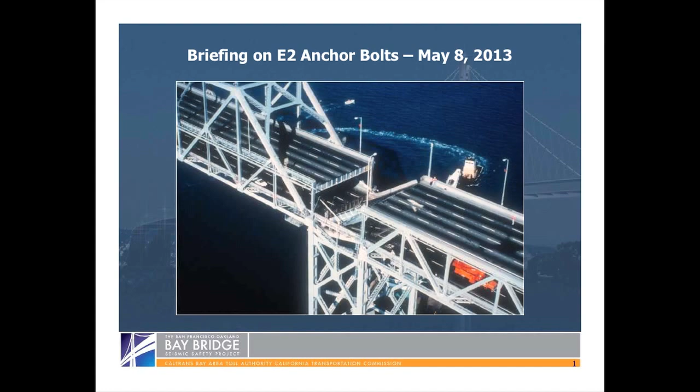We wanted to start today with this picture, just to remind everybody why we are building this project. This is from 1989 during the Loma Prieta earthquake, which was 60 miles away and nonetheless collapsed a large deck section on the old bridge. On the new bridge, we have faced many challenges. We are going to have to fix some bolts. We have fixed welds, we have fixed concrete. We have fixed all kinds of things in construction, all kinds of problems that we encounter.

That's something you do in construction. You deal with unexpected problems and fix them. But I must say also, this old bridge is the biggest problem we've got, and there is no fix to it other than moving traffic onto the new span. That is why we feel such a sense of urgency to get this bolt matter resolved, to get the fixes put in place, and to move traffic over to the new bridge as soon as possible. Next slide.

You'll recall that at the last couple of briefings we tried to organize the information we were presenting around three questions. We have added a fourth, which is sort of an offshoot of the third.

The first question: what caused the bolts on the E2 pier manufactured in 2008 to fail? Malcolm is going to address that question and provide some new information, including a report that we are releasing today. Secondly, what retrofit strategy should be used to replace those bolts?

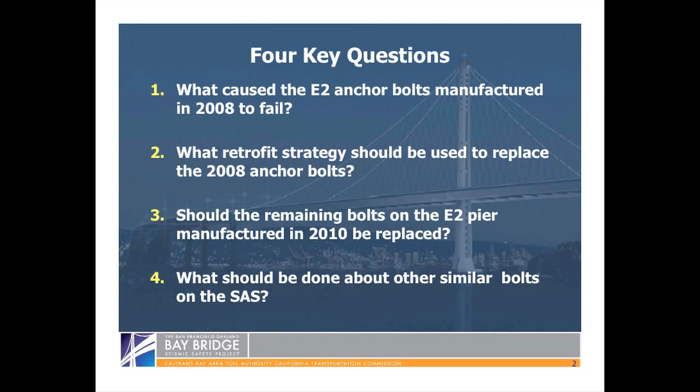Andre has an answer to that question today. Thirdly, I'll be dealing with the question of the remaining bolts on the E2 pier that were manufactured in 2010, as well as the fourth question about the other similar bolts on the remainder of the self-anchored suspension bridge. These are called A354BD galvanized bolts. That's the issue at hand.

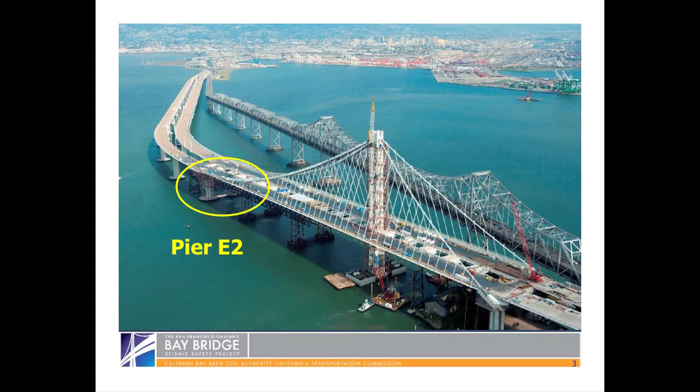Again, that's where the E2 pier is. I think you know that quite well by now. I did want to, at the outset, talk a little bit about our oversight structure, because I think there have been questions raised in the public discussion about this issue about whether we have an independent review underway. My strong belief is that we do, and this slide tries to depict that.

At the top, you see the Toll Bridge Program Oversight Committee, composed of the three parties I've just mentioned. One box down to the left, you see a peer review panel, which is independent of us. It's composed of three individuals, all three of whom are in the National Academy of Engineering, which is the most prestigious engineering body in the United States. To the right, you see BAMC, an acronym for a consulting enterprise we have hired to deal with issues that arise in this project. Their expertise spans all kinds of fields, and we have brought in additional expertise when we need to do so.

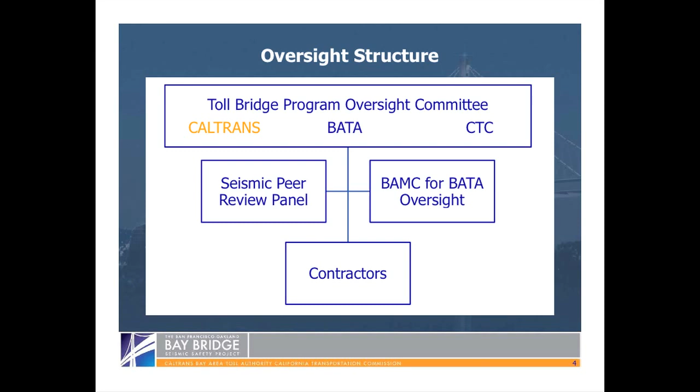And then finally, we have a whole series of contractors who are actually implementing the work. The reason we put Caltrans in orange, that's their color after all, is to make the point that that is where Caltrans is, and everything else in this operation is not them. So there is a good deal of independence here of multiple agencies and multiple checks who are doing this work with us and making sure that we do the work right.

I mentioned the peer review panel, and I do want to mention these three individuals by name because their careers are really stellar, and they have been invaluable throughout the history of not only this project, but the Toll Bridge Seismic Retrofit Program.

Frieder Seible, who is the Dean Emeritus at UC San Diego of their School of Engineering, very well-known, world-renowned expert on long-span bridges. He's now a professor at a university in Australia.

Ed Idriss, who is an emeritus professor of civil engineering at UC Davis, and he's one of those guys that whenever they have an earthquake somewhere around the world, he parachutes in and figures out what happens and helps advance the science of earthquake engineering.

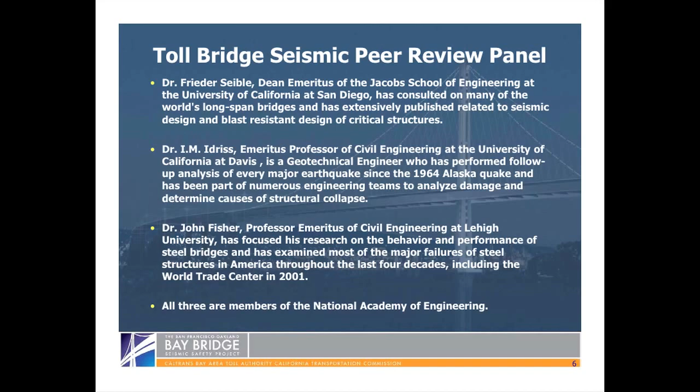And the third, especially relevant for this inquiry, is John Fisher, professor emeritus of civil engineering at Lehigh University in Pennsylvania. Very capable man who has helped us enormously on this project because of his background in examining steel failures, and that is exactly what we had here.

He has looked at those kinds of failures in many places, including on many bridges around the world. He was also called upon, if you'll remember, after the collapse of the World Trade Center in 2001, as one of the experts asked to opine about why that happened.

As I mentioned, all three members are of the National Academy of Engineering. I know there have been questions raised in some media circles about whether these gentlemen are really independent, because we pay for their airfare and whatever else we do to get them out here. I can tell you from personal experience that they are not ever bashful about telling us things we don't want to hear, and that continues in this process as we go.

I also wanted to announce today a step we are taking, in addition to all of that review, to ensure we have an independent double check on what our investigation yields in terms of findings and recommendations. We have asked the Federal Highway Administration to conduct an arm's length review of our review, and they have agreed to do so.

You have at your places a letter we sent today to Vince Mammano, the California division administrator for the Federal Highway Administration, and we look forward to working with them. They will make whatever findings and judgments independent of ours, and I think that will provide a level of reassurance to you, the public, the legislature, and the administration that we are getting to the right answers and the right solutions.

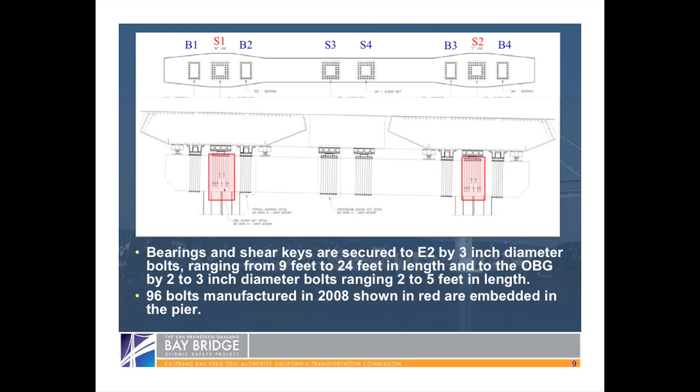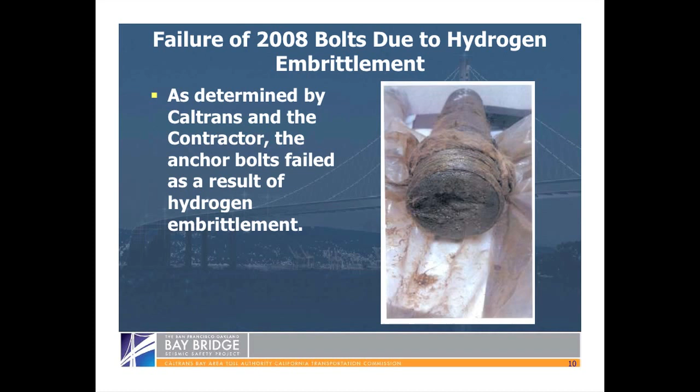Again, we know what caused the failure of those bolts from 2008 — it was determined to be hydrogen embrittlement. We have completed — let me go to the next slide and talk about hydrogen embrittlement as a refresher, as we discussed last time.

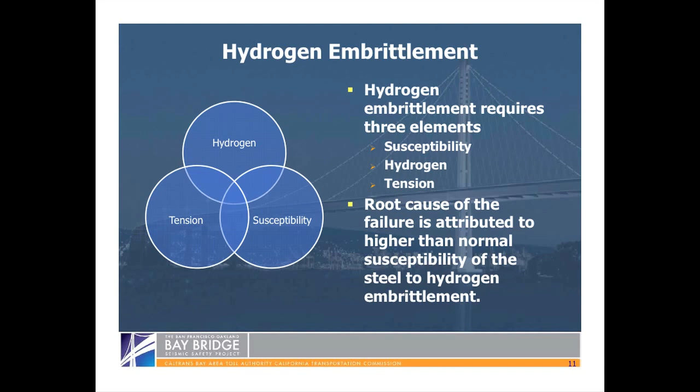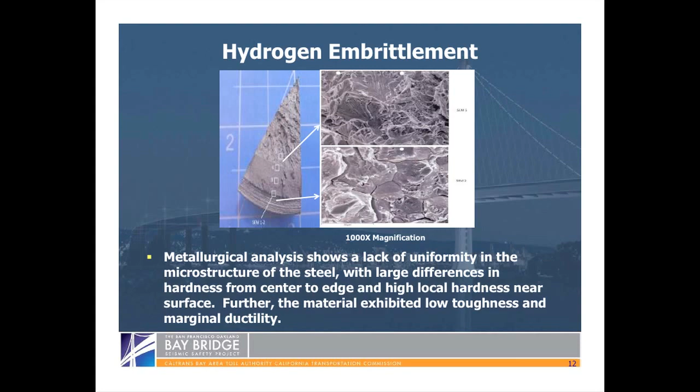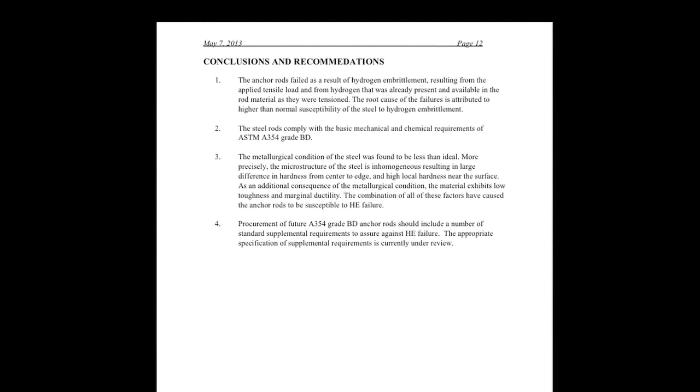In summary, it talks about the metallurgical structure and substructure of the steel in these bolts, which are fundamentally a result of alloy selection and heat treatment conditions, and has apparently made the rods less tough and therefore more susceptible to hydrogen embrittlement.

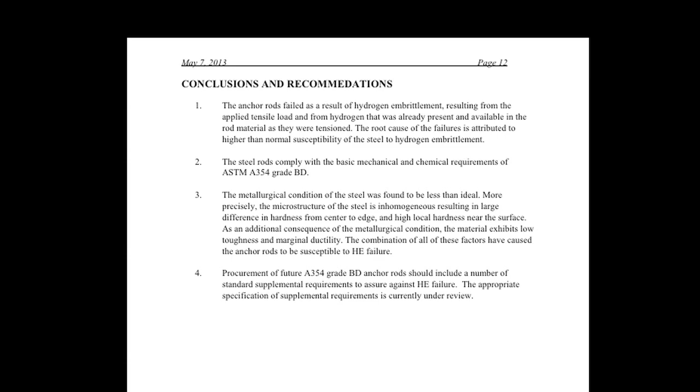On that page, the first conclusion is that the anchor rods failed as a result of hydrogen embrittlement, resulting from the applied tensile load and from hydrogen that was already present and available in the rod material as they were tensioned. The root cause of the failures is attributed to higher than normal susceptibility of the steel to hydrogen embrittlement.

The third bullet is that the metallurgical condition of the steel was found to be less than ideal. More precisely, the microstructure of the steel is inhomogeneous, resulting in large difference in hardness from center to edge, and that's what this picture represents, and high local hardness near the surface. As an additional consequence, the material exhibits low toughness and marginal ductility, and again, we're talking specifically about the batch of bolts in S1 and S2 that came in 2008.

The combination of all these factors have caused the anchor rods to be susceptible to hydrogen embrittlement, which ultimately was the cause of their failure.

The recommendation is that future procurement of A354 grade BD anchor rods should include a number of standard supplemental requirements to assure against hydrogen embrittlement failure. The appropriate specification of supplemental requirements is currently under review, and I think we'll talk about that a little bit later on, as what we're doing with the 2010 bolts may lead us to modify the amount of testing we do on this type of bolt going forward.

This recaps the recommendation that I just iterated to you, and again, the conclusions of the metallurgical study are on page 12. I also want to draw your attention to the information on the front page that highlights the individuals who authored this report. One of them is the chair of ASTM Committee on Fasteners, and the other two: one is a consultant, and one is on staff in our materials testing laboratory.

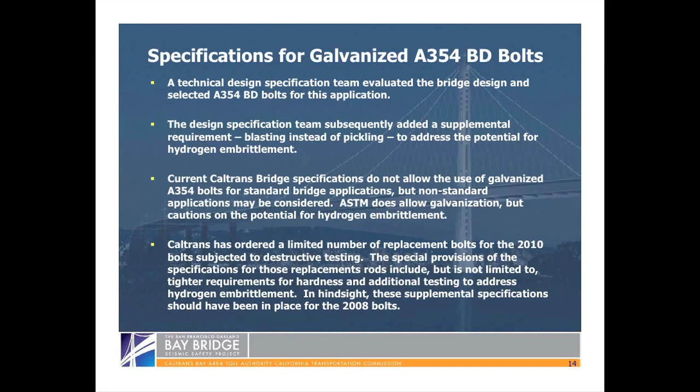Caltrans has ordered replacement bolts for the 2010 bolts that we are subjecting to destructive testing. So not on S1, S2 - there's another batch of bolts that came in 2010, and they are being tested out in the field in situ right now. We are also doing destructive testing on those bolts.

The replacement bolts for those, we have asked for special provisions, including but not limited to tighter requirements for hardness and additional testing to address the potential for hydrogen embrittlement, so that we do not have that experience again. In hindsight, these are the types of requirements that would have well served the 2008 bolts, and this is what we would look at going forward for testing when calling for these types of bolts.

With that, I will turn it over to Andre Boutros from the CTC to talk about the retrofit to the 2008 bolts that I just described as problematic.

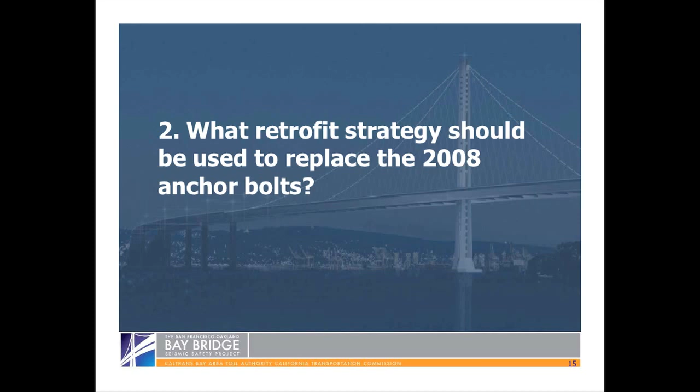If you recall from the last discussion, we talked about two options that we were investigating to put the retrofit in place. The first option was called a steel collar, and just before I describe that, let me give you a little bit of an orientation here to what the colors mean.

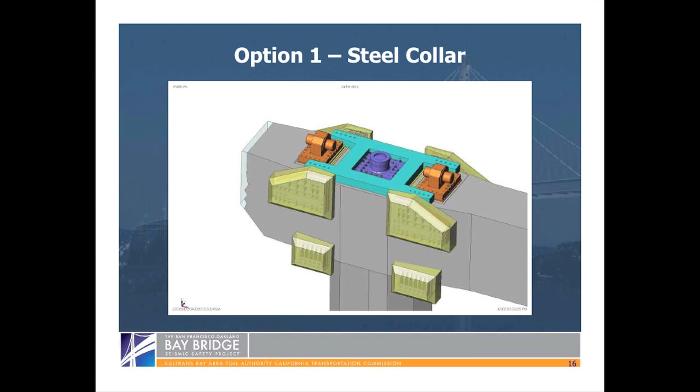The orange colors here are what we're calling the bearing assemblies. The dark blue is the shear key element that we're talking about - that's the element connected with the bolts that failed, those are the 2008 bolts. The light blue is what's termed here as the steel collar. That element is essentially clamping the existing shear key in place into the concrete on top of the columns. The bolts of the existing shear key will all be abandoned.

They'll be essentially taken out of the way so we can perform this retrofit. The yellow are elements that would be required to assist in that clamping force of that steel collar plate.

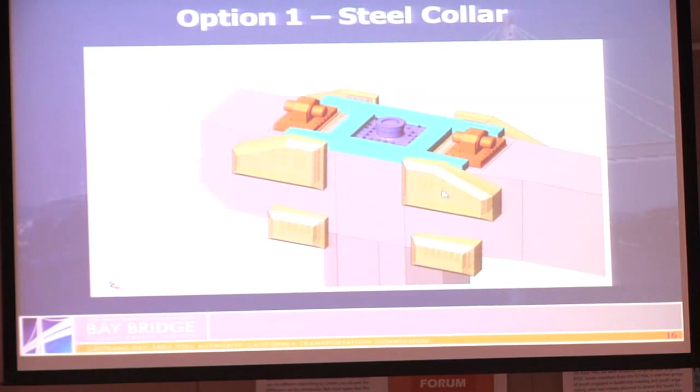So this was option 1. We have another option, option 2, called the steel saddle. What you're seeing here is the bearing assemblies, the shear key, and the purple is the new element, now referred to as the saddle, that essentially sits on top of that shear plate, and will be connected to steel cables that are post-tensioned, and will be covered in that yellow section, which will be additional concrete elements covering all these cables so no one can see what's there. That will perform the same function as the original design in terms of providing the shear capacity.

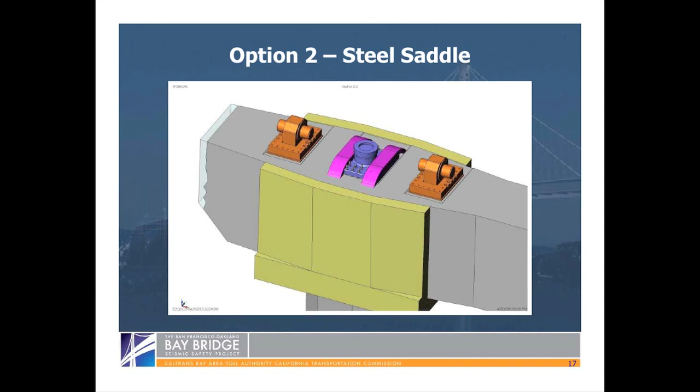For that shear key to resist the lateral forces. After looking at these two options for several weeks, we've analyzed them for constructability as well as cost, as well as pros and cons. Option 1's pros are that we do not mess with the shear key itself, we don't take it out to replace it or anything of that nature. For option 1, the pro is potentially it is simpler to fabricate because it is stacking steel plates on top of each other and anchoring them together and then into the concrete.

As far as cons, there's a lot of steel here that would be required for that particular operation, and there will be a lot of milling and shop machining to make sure those plates are smooth and can fit together. There's definitely more coring related to option 1 into the concrete that we're concerned about in terms of potential damage to other elements of that cap beam. One of the cons is, of course, the cost, which is right now estimated at $15 to $20 million.

As far as option 2, the steel saddle, again there's no need to remove the key. There's less coring required. It is potentially less difficult to install because most of the installation would be external to the concrete, wrapping those elements around the concrete cap. It is definitely less costly, at $5 to $10 million. As far as cons are concerned, there is a special or unique saddle system that would have to be fabricated to make this all happen.

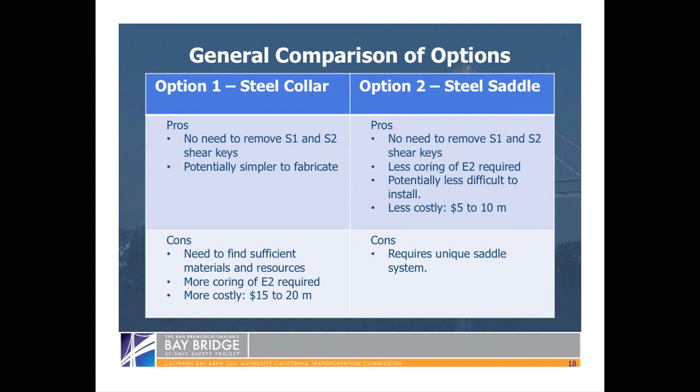After debating both options, we're recommending option 2, the saddle. It essentially, as would option 1, provides the clamping force that would be required to hold down the shear keys as originally designed. Again, the 2008 bolts altogether would be abandoned. They'll be taken out of the way where they conflict with the installation of the new assembly.

Option 2 would require more detailed fabrication. However, installation will be less difficult and will require less coring of the concrete on top of Pier E2. It is definitely less cost.

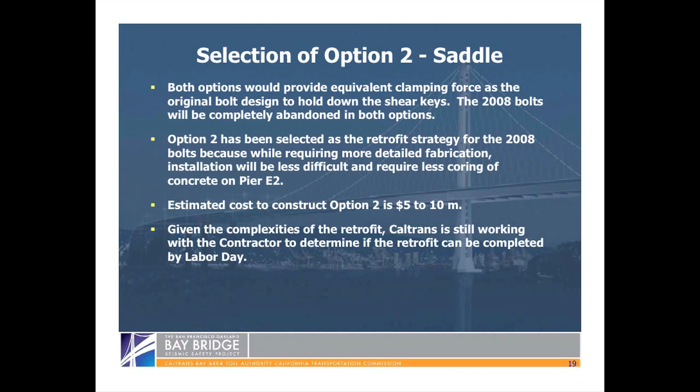As far as the schedule is concerned, we're working with the contractor right now—Caltrans is working with the contractor to make sure this retrofit can be completed by Labor Day. We do not have an estimated time yet. This is in the negotiation process, and it'll have to be worked out in terms of a contract change order with the contractor. But we're hoping this can be in place before the planned opening of Labor Day.

And with that, I'm going to turn it over back to Mr. Heminger to describe the 2010 bolt issue.

Thank you, Andre. The remainder of this presentation will focus on the bolts that have not broken, and that's obviously an important distinction. Here again is Malcolm's slide, but with a little more detail and color. As you know, we've been learning as we go in this investigation, and I think one place where we provided you an incomplete picture in the last couple of briefings is on the E2 Pier. So we want to give you a more complete picture here. We have spent most of our time briefing you on what I'll call the downstairs bolts, the bolts that have been connecting the bearings and shear keys to the pier cap, shown in the longer boxes you see on this slide.

The red ones, again, those are the 2008 bolts that failed that Malcolm has described to you. There are similar bolts made in 2010 in yellow. Those are also downstairs bolts, and they are connecting the remaining bearings and shear keys to the pier.

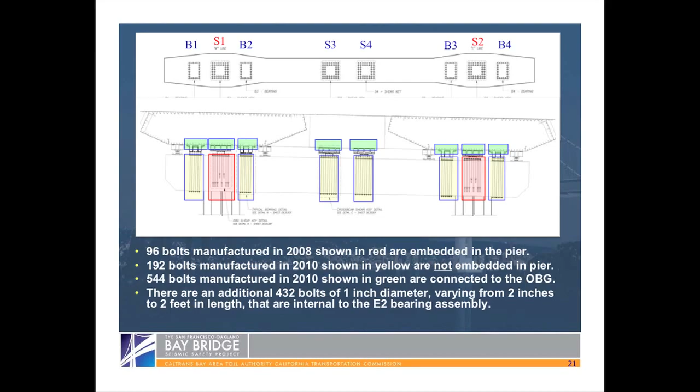The additional 432 bolts I'm now going to describe are 1 inch in diameter. They're much smaller, and in fact vary from 2 inches to 2 feet in length, and they are internal to the bearing assemblies, the B's you see on this sheet: B1, B2, B3, and B4. So that comprises the totality of the bolts on the E2 Pier.

It's about 1,200 of them, manufactured in different batches, 2008 and 2010, some of different sizes. Most of them, both the downstairs and upstairs bolts, are at a fairly high tension level, and the remainder, the ones internal to the bearings, at a slightly lower tension level. As we've discussed, that's relevant to the issue of hydrogen embrittlement, or the long-term potential we're concerned about with stress corrosion.

So having that as background, what have we been doing? We have been testing these bolts, and as Malcolm indicated, not only on site with some field equipment - I think you've seen some of that testing in the press, which is good for the public to see - but we've also been testing them in labs, and when you test this stuff in the lab, you break it.

That destructive testing has been underway, and it involves pulling them apart and examining how they fail, then cutting it up, putting it under the microscope, and doing all sorts of tests to understand what is going on.

The most important finding is out there in the field on the pier, and that is that none of these bolts have broken. The longer they stay that way, the more daylight we're seeing between the 2008 bolts, which had a hydrogen embrittlement problem that generally develops in the short term, and the 2010 bolts, which do not seem to be developing this problem.

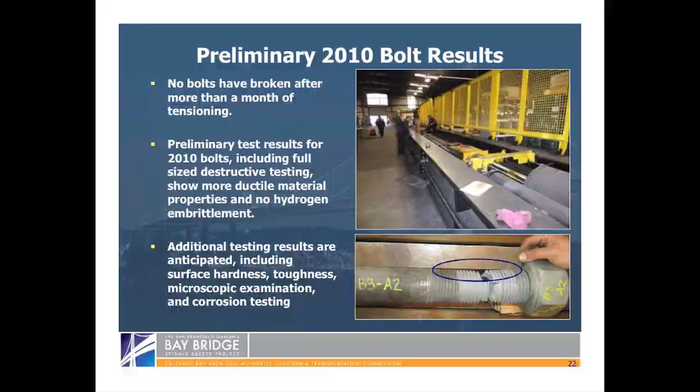We are also anticipating additional test results after today that will be ongoing for the next few weeks, and then there's another test I'll describe that will take a little longer than that.

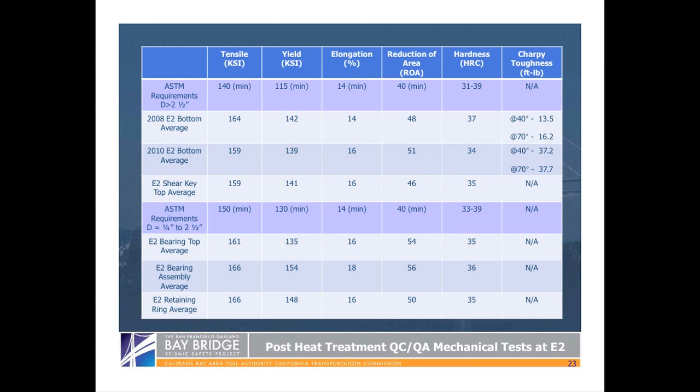If you'll help me with the cursor again - right below the 2010 bolts, you'll see the E2 shear key bolts, and again you'll see a hardness value more consistent with 2010 than with 2008. If you go down the list, you'll again see values, most of them closer to 2010 than 2008. The reason we have two ASTM standard rows on this chart is because they have a different standard depending on the size of the bolt. The bigger bolts are on top, greater than 2.5 inches in diameter, and the smaller bolts are on the bottom.

So again, the data we're seeing is showing a divergence between the 2008 bolts that failed and the 2010 bolts that have not, on various elements of the pier cap.

The other test I mentioned earlier is something we're calling the wet test. What it is, is a test that's trying to - I see some snickering going on, you'll have to stop that - we're trying to simulate a long-term phenomenon, which is stress corrosion.

I think we mentioned earlier that hydrogen embrittlement and stress corrosion are both time-dependent. When you do a test on a material, you don't see it right away in the material - you have to subject them to conditions that simulate a time-dependent failure. In the case of hydrogen embrittlement, as Malcolm indicated, what we're specifying for any replacement bolts is some kind of time-dependent test before you put them on the pier. For example, you take them into a lab, put them under tension, and see if they break. We didn't do that with the 2008 bolts, and we should have in hindsight, because that would probably have shown us the problem in the lab instead of on the bridge after they were already installed. That's the kind of test you need for the embrittlement question.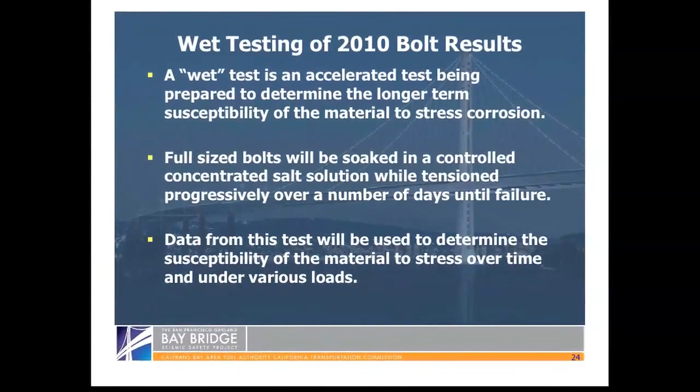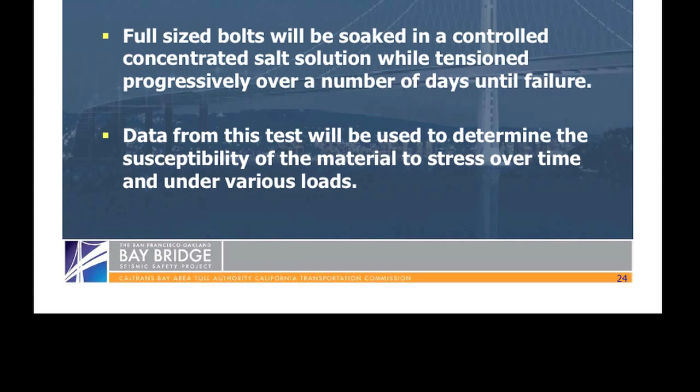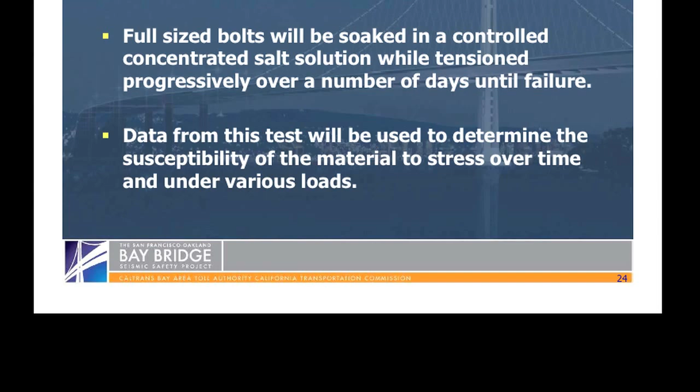We're going to take full-size bolts off the pier from the 2010 batch, and they're going to be placed into a bath of salt solution and tensioned progressively over a number of days until they fail. From that test, we'll learn the particular susceptibility of the 2010 material to stress over time. That will give us good information about how to deal with those bolts in the future, whether they ought to be replaced in the near term or longer term, or whether we ought to reduce the tension on them, given the design of the bridge. We really think this test will help guide what we do with these bolts over the life of this new structure.

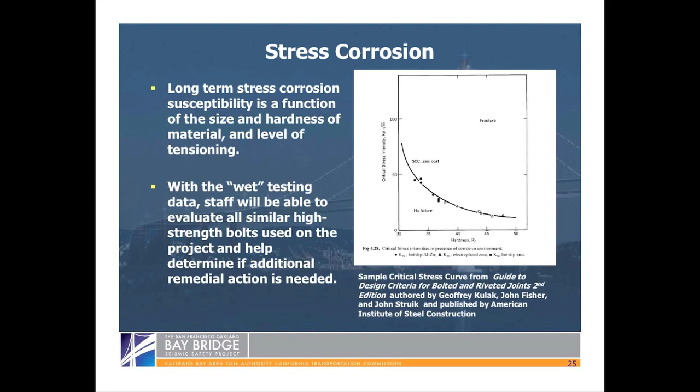The horizontal axis at the bottom is a function of hardness. The vertical axis on the left is a function of two things: the tension level the material is under, and the size of the material. Size does matter here. As you go up that scale, you have more of a problem. As you go right on the horizontal scale, you have more of a problem. So if you have a very hard material, you want it at fairly low tension. If a material is at very high tension, you want it to be not so hard—you don't want it subject to the brittle condition that can lead to failures. This, by the way, is from the textbook of John Fisher, one of our experts.

So those are the bolts on the East Pier—about 1,200 of them. There are another roughly 1,000 bolts that are 354 BD galvanized on the rest of the SAS. What have we done about those? As we informed you at your last meeting, we've been conducting visual inspections of those bolts on a regular basis, and they are performing as required.

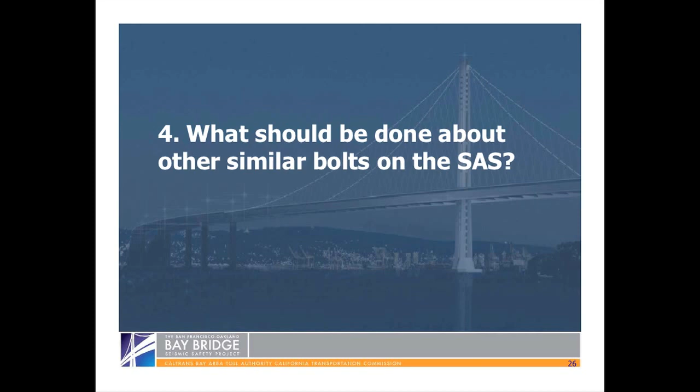It's worth noting, as we did last meeting, that some of the E2 bearing assembly bolts—the ones inside those bearings—we cannot inspect because they're enclosed. They were observed before they were put in and the bearings were closed up. We are tracking down their quality control data, as we've shown here, so we know quite a bit about those bearings. The one thing we can't do with the internal bearing bolts is pick apart the bearings and look at them directly, but we have the observations we made before, plus the quality control information we're assembling.

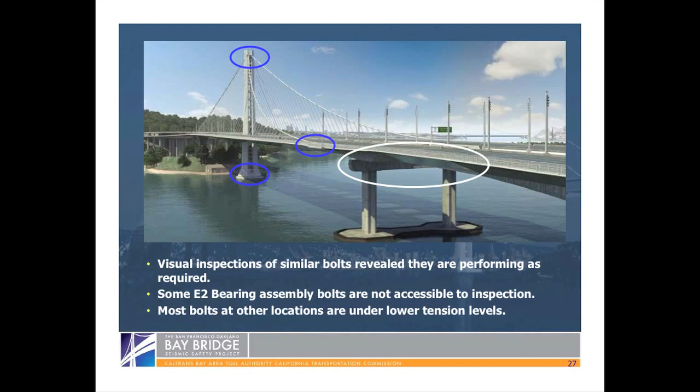The relevant characteristics for you to look at on this chart are, first, the diameter—the bigger they are, the more difficult they are to manufacture, and also the higher up they go on that stress corrosion potential chart I showed you. Length is not as important; the longer they are, that's a bit of a manufacturing challenge, but not as significant as the diameter.

You can see the quantities depicted here, and it adds up to about 2,300 bolts on the SAS. Again, this is contained to the self-anchored suspension bridge, the steel element of the bridge. The vast majority of the length of the new bridge is a concrete skyway, with no bolts.

And finally, highlighted here in purple, that's the tension, and as you can see, it's a fraction of FU. FU is not what you think it means. It's the ultimate capacity, in other words, when it would fail.

You can see that on the east pier, we've arrayed these from roughly more tension to less tension. The east pier is where we have the highest tension levels, which is why we have focused so much of our attention there. As you head down the chart, you see much lower tension levels, in some cases what we would call snug tight, just as you would snug up a bolt anywhere in your garage.

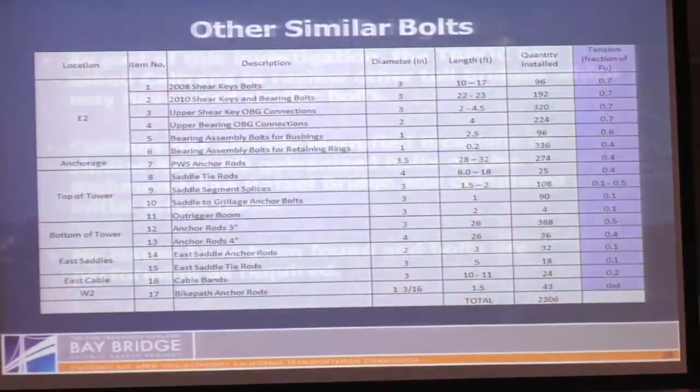As part of our investigation, we have also asked Caltrans to review the other toll bridges in the Bay Area and whether or not they have used any of these A354 BD galvanized bolts, either in new construction or in the retrofit program we've had underway.

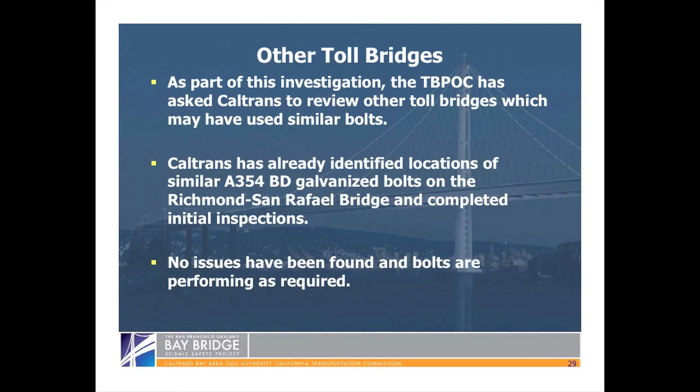Caltrans has identified one location where they were used, on the Richmond-San Rafael Bridge retrofit. Caltrans has been inspecting that area for some time and has records, and they also went out and did some visual inspections over the weekend. We have observed no performance issues.

There are a couple of very important points to make about the Richmond Bridge bolts. The first is they were installed well before the bolts we're talking about here on the SAS. We are going to track down their quality control records and the like, but we're not certain where they were manufactured, though they were put in well before these bolts at issue.

I think the most important difference is they are also snug tight. They are not under any real tension load at all, and that tension is really what matters in terms of near-term embrittlement, which they do not exhibit, as well as long-term stress corrosion potential, which they should have a very low susceptibility to. But we are going to do our due diligence on these, just as we're doing on the SAS, to track down the quality control and continue inspections to make sure we're okay.

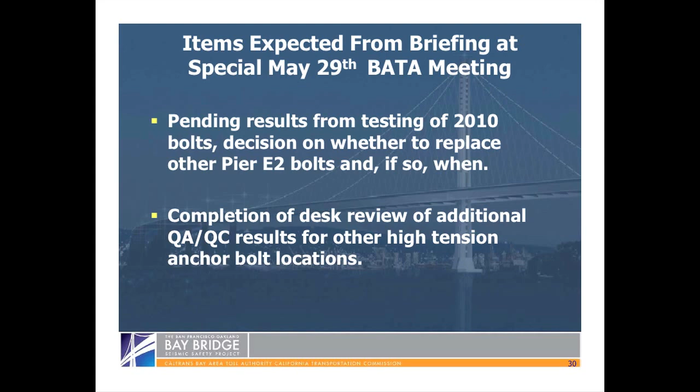In closing, let me draw your attention again to that letter from the Federal Highway Administration, because I think it gives you three helpful categories into which we believe we will be classifying the bolts on the SAS in terms of our future activities on inspecting and repairing them.

The first category we intend to classify bolts into is bolts that are to be replaced before opening the bridge to traffic, and we already know that the 2008 bolts fall into that category. We do not know yet whether any other sets of bolts fall into that category, but we will be able to tell you that, I believe, on May 29th.

Secondly is a category of bolts that are to be replaced after opening the new bridge to traffic, as a precautionary measure to avoid premature failure due to stress corrosion. So what that means is we may decide to replace some bolts that haven't broken, but as a precaution to avoid a concern about stress corrosion in the future.

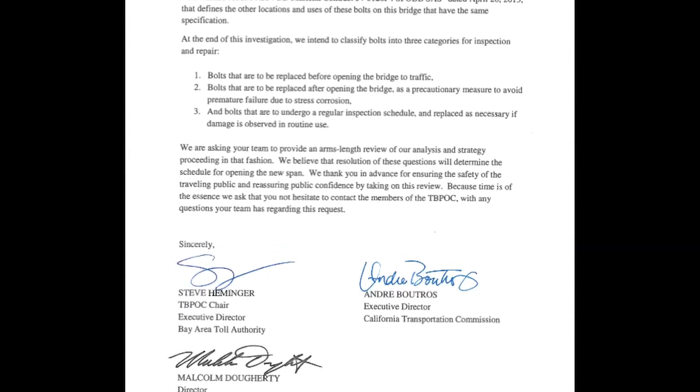Finally, there will be bolts that we expect, and we expect the vast majority of them will probably be in this category, that are to undergo a regular inspection schedule and only be replaced as necessary if damage is observed in routine use. One helpful way of starting to think about how we might differentiate is between the bolts that are on the East Pier under high tension and the remainder of the bolts on the bridge. That is the drift of the data we have received to date, but we do not have all of it yet, and so do not want to make that judgment until we do.

And so, Mr. Chairman, that concludes our presentation. We appreciate your patience, and we're available to answer your questions. Thank you, Steve, Malcolm, and Andre. Appreciate that report. We're going to start off with Commissioner Campos.

I don't know if the chair wants to start. Well, I just had a couple of quick questions. Yeah, I didn't. Either one? Okay, you're the chair. Oh, thank you, sir. I have several, but if I could just start with a couple of them.